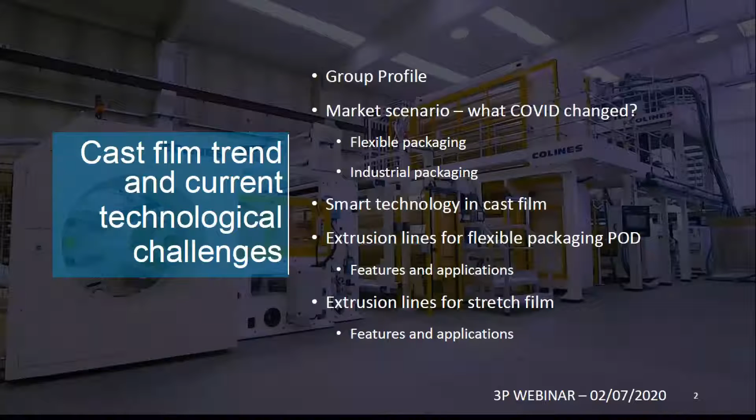So, brief view of our group. We have about 8 units. Basically, 7 of them are on quite a large scale, having a manufacturing division, whilst 1 is only service. We have around 60,000 square meters of owned factories where customers can come and see live at least a dozen extrusion lines for our trials, as well as the lines in manufacturing for our customers.

A good thing to know, and an important one, is that one of these companies, called Elav Electronics, fully owned by us, is a vertical integration within the machinery manufacturing, since we basically engineer and manufacture, based on the Siemens platform, all the electronic and electric parts of the machines, which in any case come shipped in a 40-foot container, dust proof and heat proof with air conditioning inside. So it's really A-class equipment for any kind of machine we supply. So talking about the market scenario, what COVID changed in plastic?

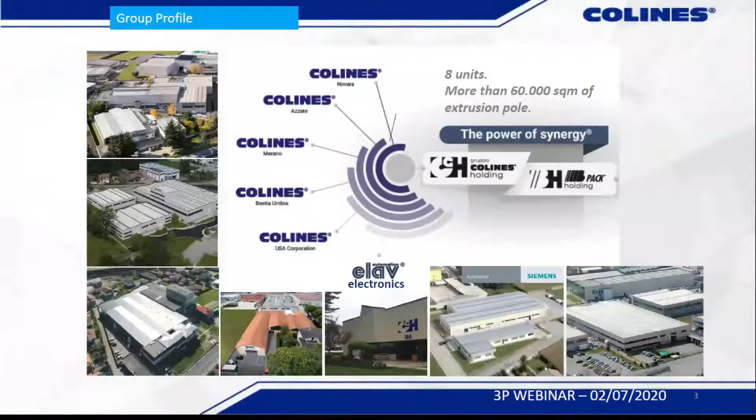I mean, we were having a very difficult, tough time linked to the plastic segment because of the pollution, but definitely this COVID pandemic shows that plastic is really, really necessary, starting from the frontline workers, talking about medics, or everyone also in the military having to deal with people having this disease.

But then it has been scaled in a fast way towards also the packaging of the food, because it has been seen as an additional safety. So wherever food was not packed, it started becoming packed, for example in some areas of Asia. Basically, what is a really clear fact is that plastic itself is indispensable for the future. Then the challenge is how to recover it. And this goes to the next chapter.

So which are the new trends, mostly in flexible packaging, but then going down to industrial packaging, because then you have to move all these goods. So basically, multiple segments of the food market, medical markets, cosmetics, they require further downgauging, because most of them are shifting to easy laminates, being monomaterial, as defined in Europe, but it is also going the same way in other parts of the world.

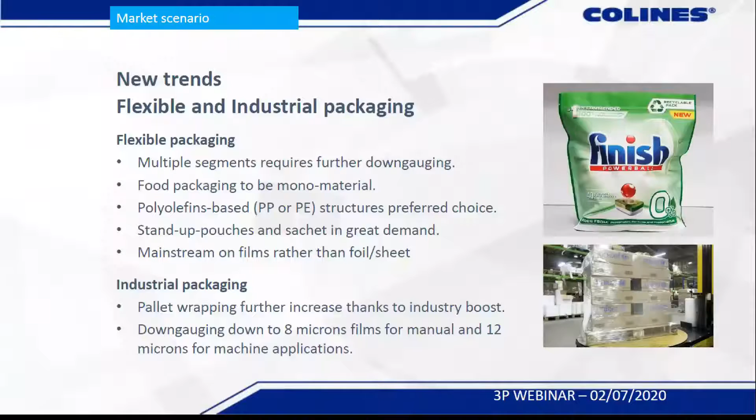This is, let's say, the thinnest film the market is now strongly requesting. Then clearly the 12 micron or whichever thickness is as well in great demand. What we have done as Colines in terms of the machine side: we've been working with polyolefins only, and we've believed in polyolefins since our foundation. The first casting lines were delivered in the early 80s. So the POD lines, the polyolefin design machines that we've engineered and manufactured, actually reflect the market now.

To lower the production cost, we've worked a lot on technology, especially for heating the machine parts, so the infrared technology, of which as of now we are the only manufacturer, is already running in our extruders and our MDO, first installed in 2013. Now we've supplied almost 100 extruders with outstanding reliability. In terms of product enhancement, we have developed the MDO units, now 8 machines, 4 of them under installation, 4 of them already working on a global basis. This was a patented unit and a great innovation.

In terms of process enhancement, we have inaugurated our touchless machines, meaning that the machines show a kind of automation and intelligence that was not there in the past. So all the start-up, all the ramps, change of colors, change of recipe, it goes based on HMI settings. So it's very easy.

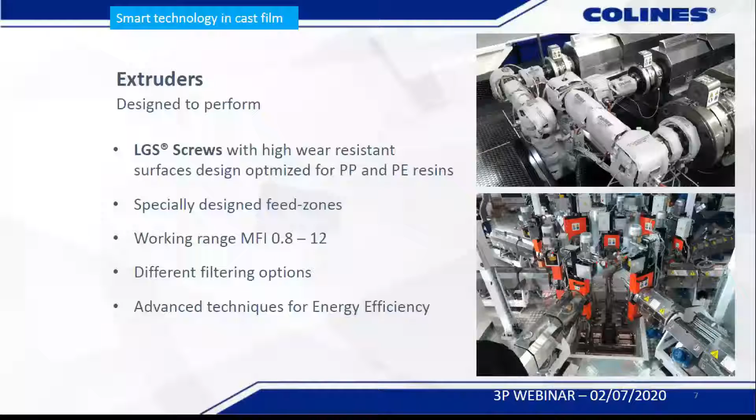It grants and permits a 30% saving over even the best ceramic contact heaters that we've been using till 2012. We've tested machines for 1 year, excellent machine, and the 30% was even 33%. But you know, I take all the precautions saying 30%.

They grant a visible gain in screw torque, so the extruder performs even better, and it basically is a very economic and especially very reliable solution. I have in stock steel quartz tubes that I supply to customers because it's really a reliable system. Why is it so reliable? Because we have developed a software to manage the infrared quartz tube. Otherwise, those kinds of lamps are very fragile as per their nature.

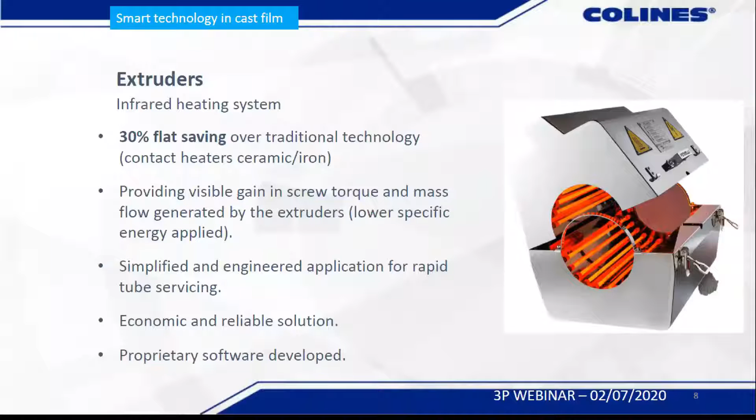In terms of the casting unit, we have a new layout of the machines that sees a new inclination of the die. We have even further improved the wall, making the cooling process more efficient. And now the unit can be moved within linear guides, so up, down, backward, forward, but not anymore on wheels, providing much better control over vibration at very high speed. We also went 1,000 meters per minute with machines for stretch film with this kind of design. And basically it also makes easier the way the recipe sets the machine.

We have an improved pinning design. We are also working with the auto calibration unit within the edge pinning design. And the casting unit itself is manufactured and engineered in a modular way. So many add-ons are available, including post-cooling rolls or intermediate cylinders to make annealing or short stretching straight on the casting unit.

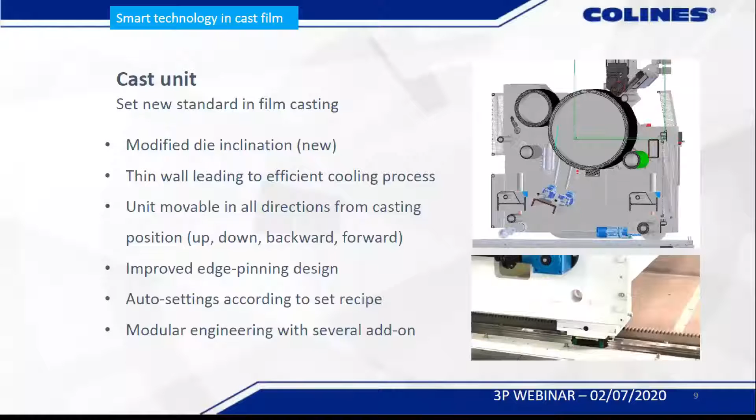About the touchless operation, we use the new Cloren Reflex die, providing superior control over the thickness tolerance. We have developed a software cooperating between the measuring unit and the die, so that in 2 minutes we can go to 2 sigma 0.2, even with big lines. So also change of thickness and especially startup of the machine now requires 1/5 of the scraps that were collected before. There is also the option for making the deckling with motorized motion, so the line then becomes really touchless.

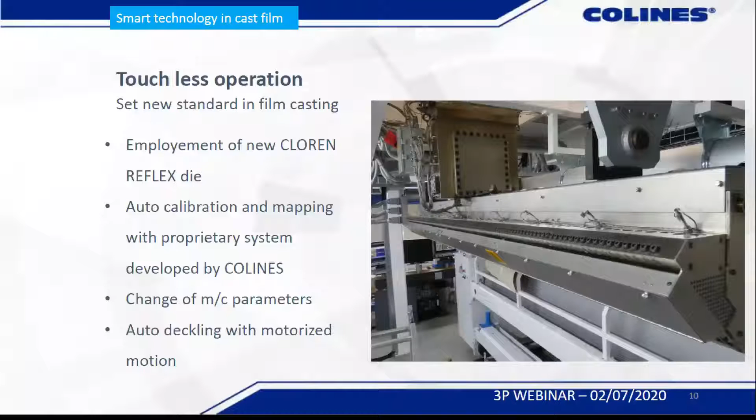The novelty that we've already been using since 2009 is our big mouth system, which basically is a rotary channel feeder. It's not a vertical hopper. This results in a very homogeneous and compact stream of the fluff mixed with granules. So it's an ideal unit for pre-mixing, and it grants total air extraction as the mix is getting fed into the extruder. It also grants very low consumption at max output; for example, on a 3-meter stretch machine or 3.2-meter CPP MOPP lines, it consumes only 4.5 kilowatts. And it permits adding trims coming from other rooms, like for example the slitting unit. It can be employed in 2 ways.

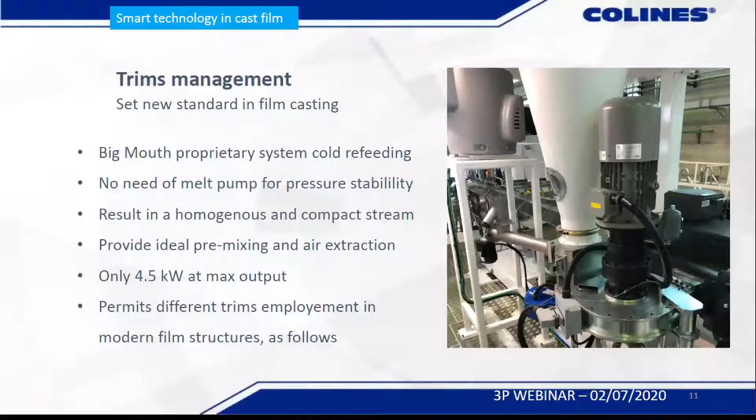The first way, the conventional solution that we've been using for long and are still using, is refeeding the trims in the core layer. So making the mix in the core, normally homopolymer layer or LLDPE, even metallocene with stretch, but anyway in the core layer. The film foil you see here is for a CPP MOPP film. But the new solution we have already supplied in 2 machines.

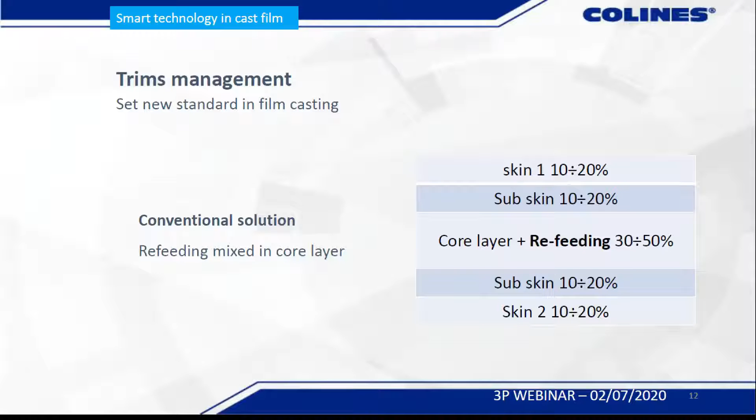It's refeeding the fluff as an individual layer, always in the middle, but there is no longer mixing between virgin granules and fluff. You avoid at all any risk of any kind of impurity. If you match it with the new screw, the film really becomes like glass. It does not impact the other layers made of virgin materials, and this 10 to 15% is about the machine trims. But if you want to also include trims coming from other slitting operations, this percentage might come up to 20%, and we didn't see any problems in going to that percentage.

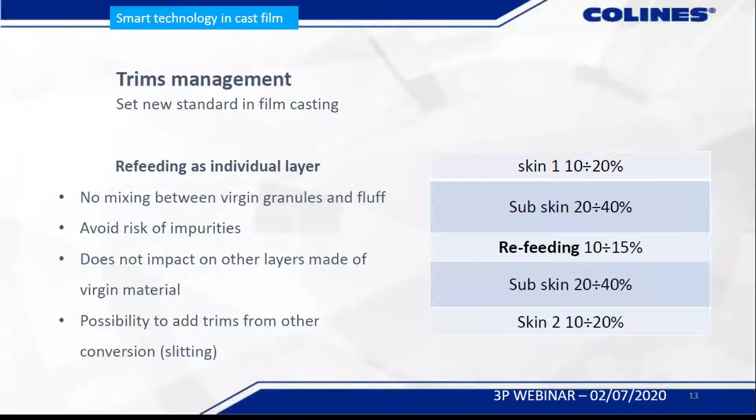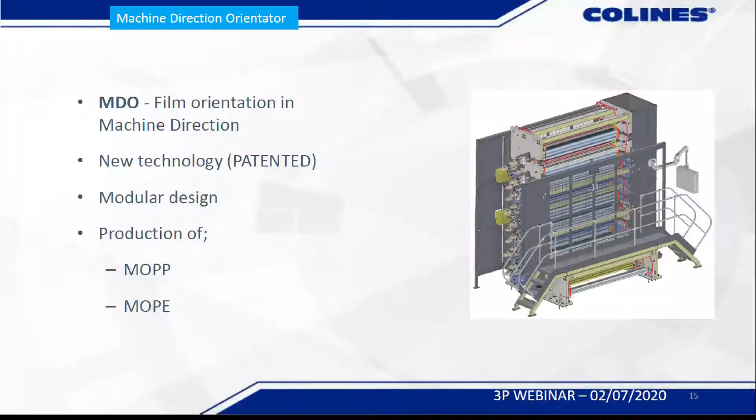Talking about MDO technology, machine direction orientation is the acronym. It's a new technology that we've patented for the heating part. It's engineered with a modular design, so you can introduce a new number of rolls if you want to make different stretching in future, and it permits producing oriented polypropylene called MOPP and oriented polyethylene called MOPE. What is new is we use infrared heating inside, so there is no longer a liquid passage like water, pressurized water or oil.

So we have segments set up. Basically, we can define up to 5 different zones to heat within the left to right cylinder.

And with a special technique, we are able to keep the neck-in very, very small. We are talking about 50 mm each side, whilst with the standard MDO unit, you go minimum 250 mm neck-in after stretching.

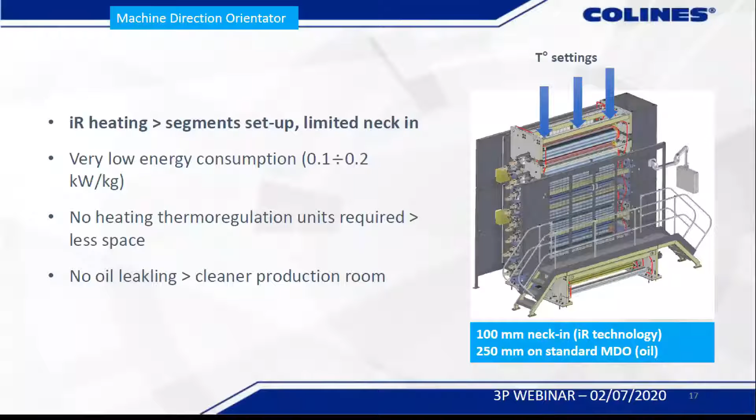It grants very low energy consumption, really very low, because we don't have any heaters or pumps to push the oil around the circuit anymore. It's also very stable in consumption, because the preheating and target settings are reached consistently, since the machine has temperature sensors on the film and inside the cylinders.

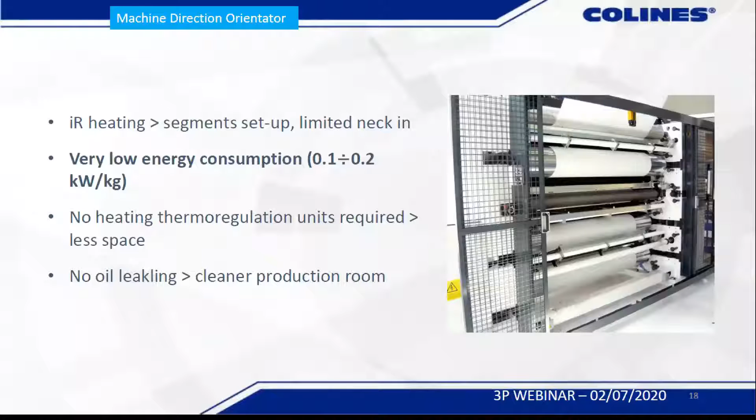So this is the traditional setup - this is the last MDO unit we supplied in 2017, and this is the traditional thermoregulation unit, required for serving the MDO unit. You can see the difference is enormous.

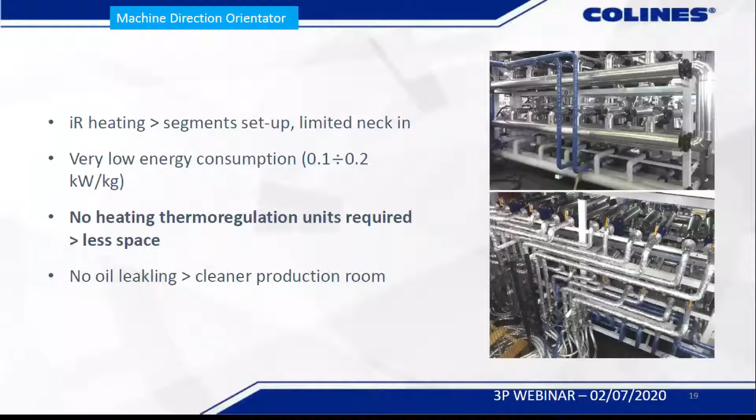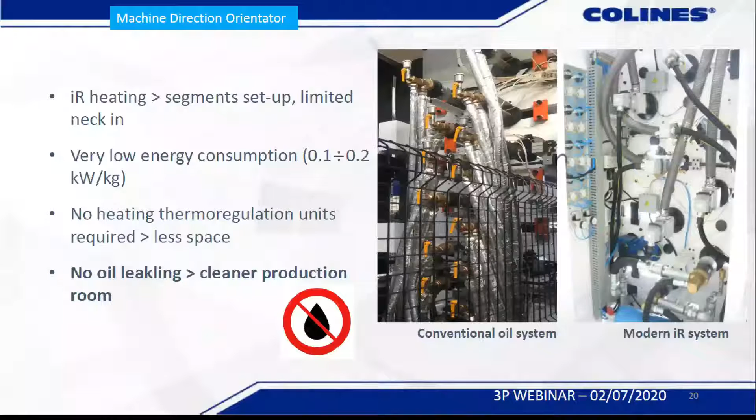One of the most important things is our electromechanical unit that permits us to work by gap or by contact, including very soft contact, basically with no air entrapment, even for very thin film.

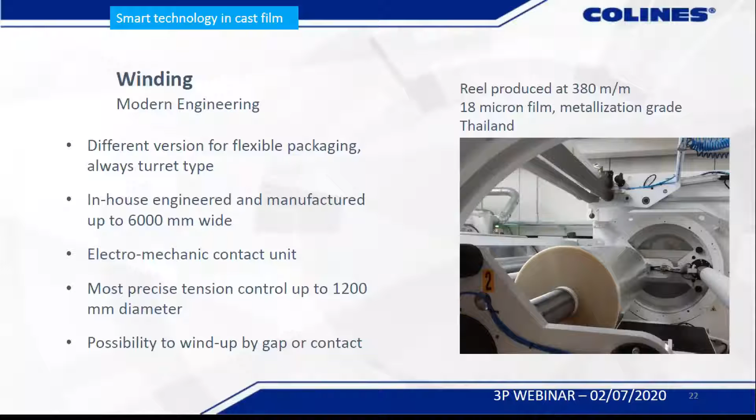Here you can see the same winding unit working with inline slitting in Belgium for 9-layer film for sliced cheese, a growing application in the CPP market, or another one for retort-oriented film in Italy.

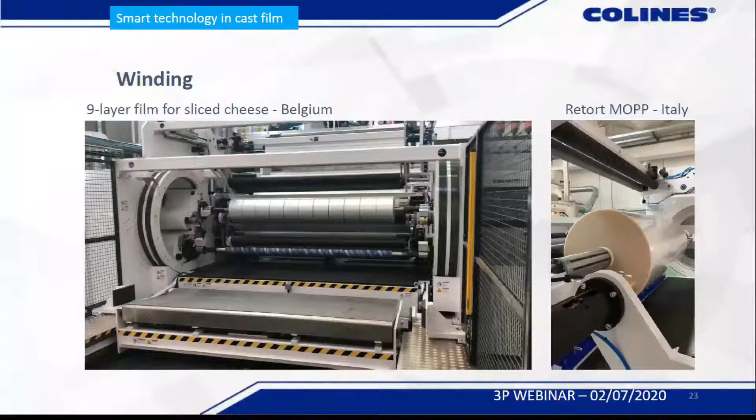So I'll try to be very fast, sorry.

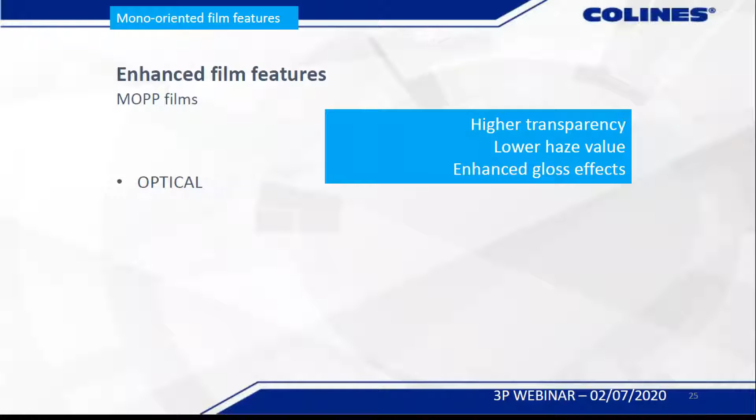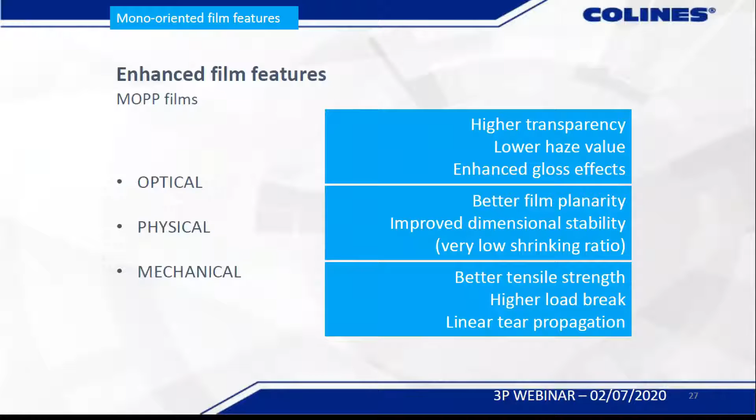Thank you. The MOPP grants optical, physical, and better mechanical characteristics, specifically a better linear tear propagation. The film properties show a 15 micron MOPP having better behavior, so there's room to down-gauge in many applications.

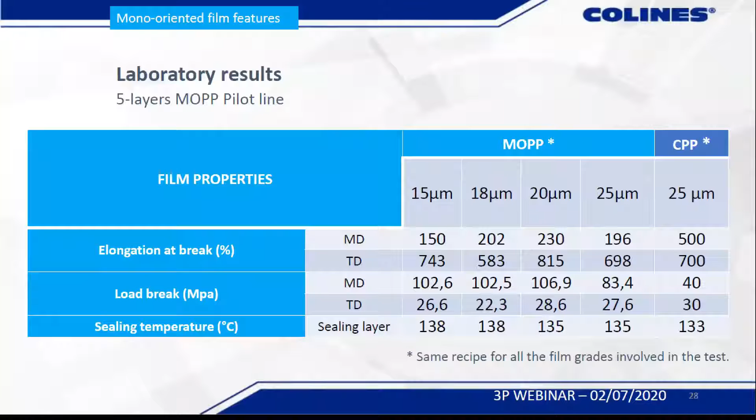If I look at the applications, there's stand-up pouch sachet, such a big market, in which many different products - liquid, solid, or semi-liquid - can be used.

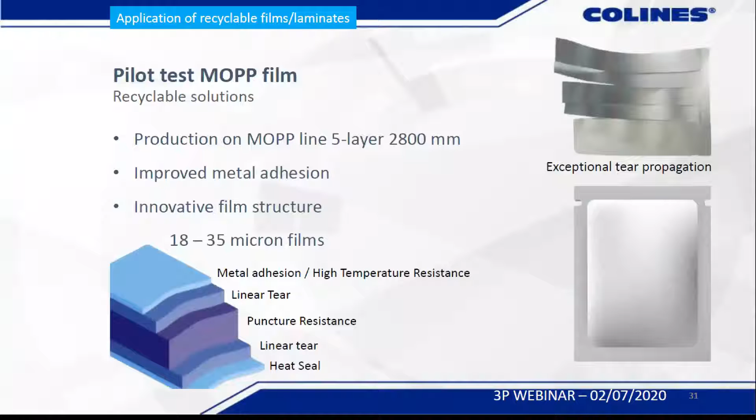We have made different 35 micron sealing grades, as well as a printed grade available in 18 micron, keeping a perfect linear tearing propagation.

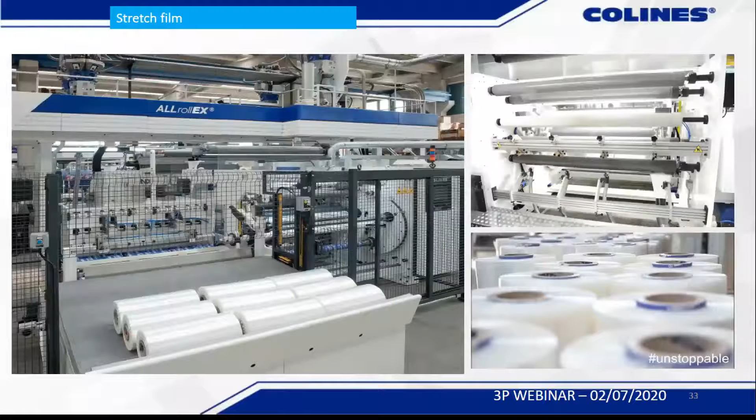I will just spend a few words about stretch film as well. We can supply machines from 1.5 meter to 3 meter, from 700 to 3,000 kg per hour, all formats available. Basically we can produce from manual to jumbo reels on the same machine.

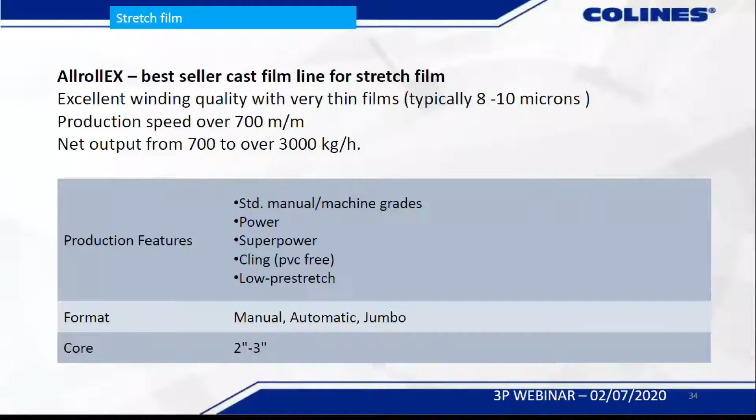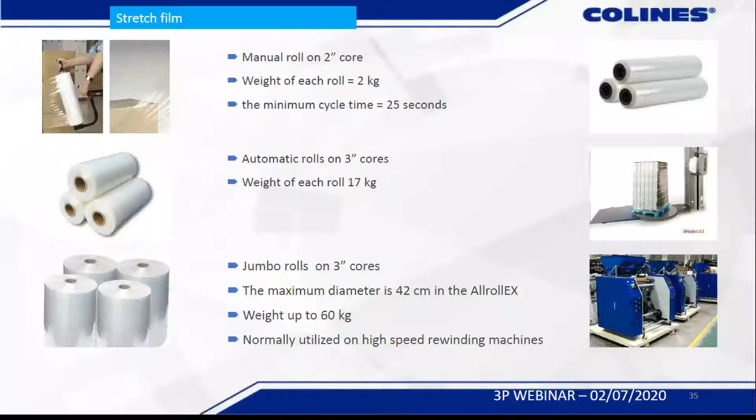We can make any kind of film - automatic power film, pre-stretch film in line with different stretching levels. We also work for cling wrap film applications as well as silage film for agricultural application.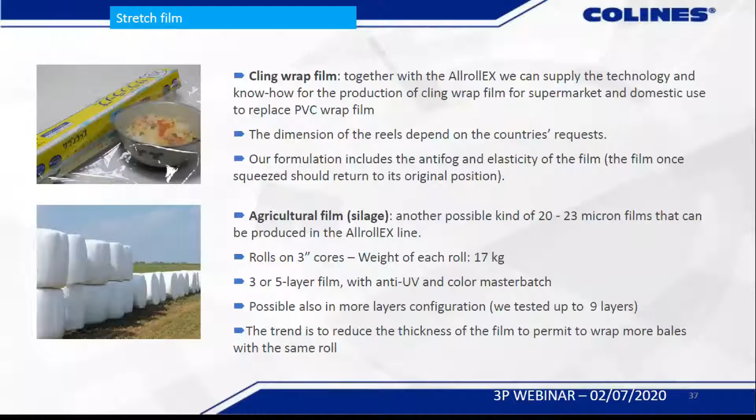I'll skip this - the good thing is we always have lines available for quick delivery, 1.5 and 3 meters for stretch film, so customers are very welcome to inquire with us.

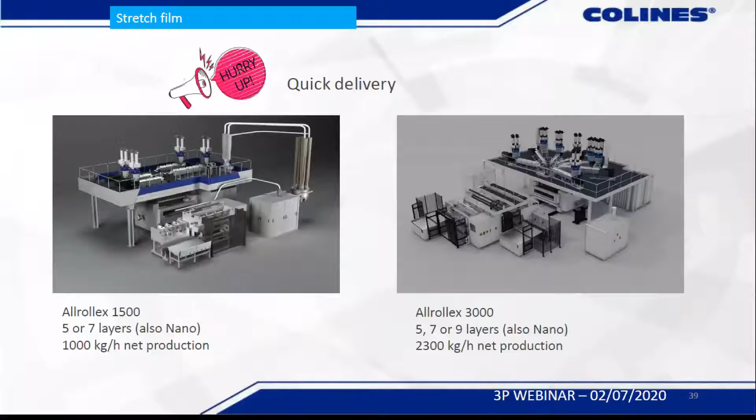Last but not least, as told, we have pilot lines available. We are going with the new range of blown film for flexible packaging and hygienic film packaging. We'll have 2 lines installed in our factory for trials with customers - one 7-layer and one 3-layer, both with MDO.

Then I have to say, I have to salute my dear friend Amir Irani that proudly represents me over there in Pakistan. So guys, thank you for your attention and I hope you enjoyed my presentation.

Thank you very much, Francesco. That was very interesting. You highlighted some of the key features that your machines and equipment can offer - the hygiene aspect, the non-touch features in your new HMI, the energy efficiency, and all the mixed solutions. I'm sorry I had to rush you through. I know you had a lot of detailed explanations available for the technologies you offer, but I'm sure people will be in touch with Mr. Hirani and yourself once this webinar is over, and they will be able to benefit from it.

Moving forward, now I would like to request... Thank you very much. Sorry if I interrupt you. No problem. Thank you very much. We have some questions at the end, which we will forward to you. We do have some questions, which we'll attend to at the Q&A session.

Now I would request Lucia Buffoni and Burhan Farooqi from REPI to come forward and make their presentation. This is going to be a combined presentation from both of them, giving you an overall perspective of the market with regards to circular economy and color technologies in the packaging and plastic industry. They would be talking primarily about the global behavior and how the industry is transforming. With this, I request both of them to please proceed.

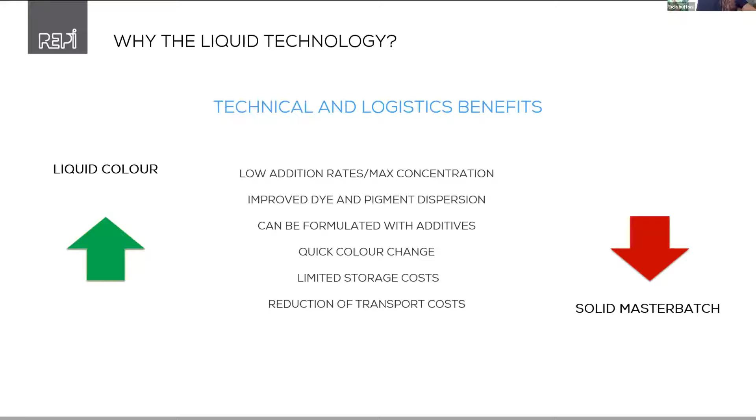Of course, the liquids are much more concentrated, so this leads to logistics which are more efficient, and storage at customer sites. The storage of our colors requires less space than big bags of granules.

Just a few numbers to let you understand the concentration advantage that we have. If we are talking about transparent shades in packaging, for example in a preform as well as in a sheet, the ratio between dosage of liquid and solid master batch is set at around 1:10. Sheet extrusion is even greater, 1:17, because you really need a limited LDR to color the piece perfectly.

Of course, going to opaque colors and talking about titanium dioxide, which is the only one giving the coverage, for whatever reasons - it might be just for aesthetics, or also for performance reasons. If you think of the dairy industry, the dairy packaging, they need protection from light and so on, then titanium dioxide is needed. In this situation, the ratio and the advantage of the liquid is narrowing, so it's limited, but anyway it's there. So liquid color and liquid additive technology are normally more concentrated than solid master batches.

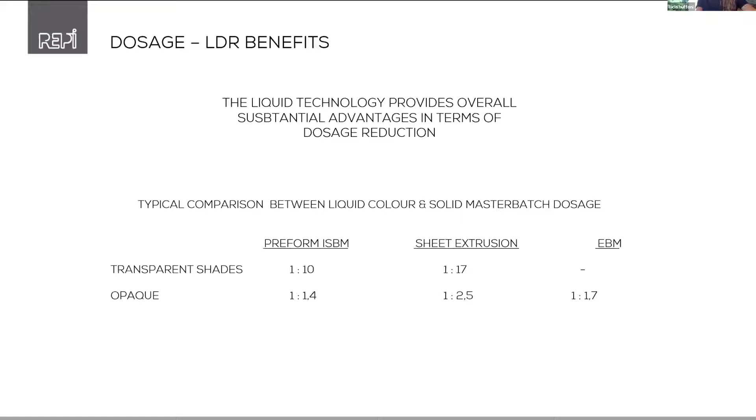Okay, so how do liquid colors and additives fit with a circular economy? We said that REPI is in plastics, and it strongly believes that plastic, as Francesco correctly said before, will still be the material of the future for many applications, especially when it comes to packaging. This COVID situation, but not only COVID, was just another proof that plastic packaging is the choice for the future and provides hygiene, safety, single portions, logistics, and so on. So how can we fit with the need on the other side of the circular economy?

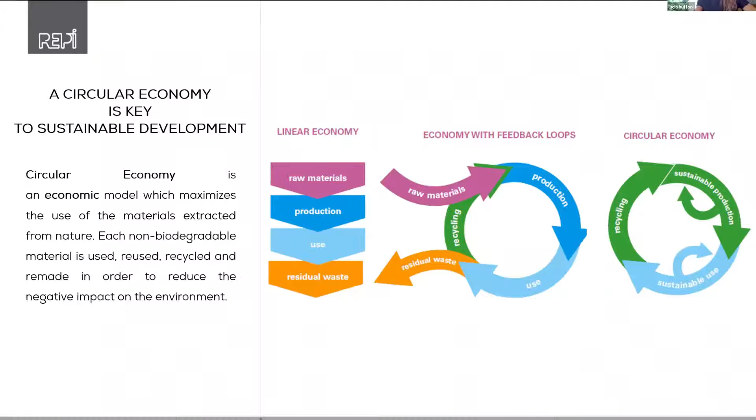So first of all, what is a circular economy? I think everybody knows, because it's really on everyone's lips. We need, and the world needs, to pass from a linear economy - where you have raw materials and products which are used and then thrown away - to a circular economy, where basically most of the raw materials that I use, being plastic but also other things and materials, should be used and reused several times. Plastics, of course, fit with the circular economy, since they are meant to be used several times. It's not really that plastic remains on the world because it's meant to be this way - it can be used and reused several times.

So from this idea, and from the fact that we are dealing with plastics, we created the brand REFIT. Basically, we add a fourth R to the three that are commonly used when we talk about circular economy, which are reduce - try to reduce whatever is not really needed, try to reuse whatever you can, try to recycle whatever you can. And so we add REFIT. We wanted, with our range of products, to give back and to refit, to make plastic, and especially PET, fit again to be used again for packaging.

First of all, what does REFIT mean? So REFIT is a global concept. We try to approach the topic of passing to a circular economy in a complete way. First of all, of course, we strengthen the liquid color technology, as said before, mainly because it has some features and advantages that I already explained before, but I would add in this case that the liquid color technology has overall a lower carbon footprint than other color solutions.

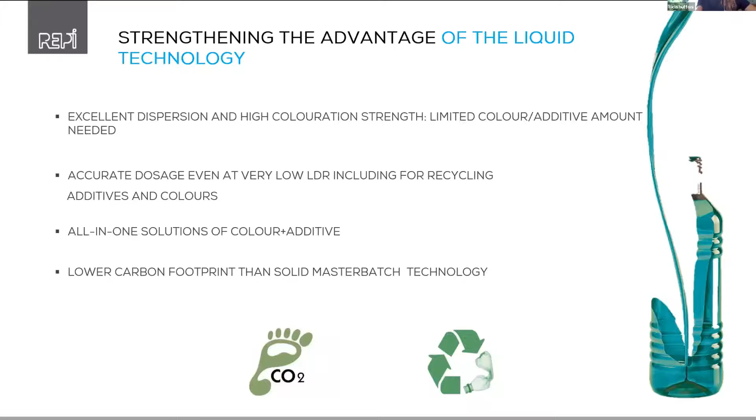Based on the carbon footprint topic, we decided to look inside. Even before going to the market, we looked at our internal production and at our internal way of working. So trying to make our production process and our factories the most efficient possible from an energetic point of view, and the waste management and the raw material supply and handling. So we discovered, and we traced more or less 7 big steps.

Sorry, I don't see. Okay.

7 big steps that start from the raw material supply and the choice of the raw materials that, of course, come from certified suppliers that as well are sensitive to the sustainability issue, going to their transport to our facility. And then going through this flow chart, we discovered that if compared with the same process, but in the solid master batch manufacturing, the carbon footprint is always lower.

If we look at point 3, which is really our business, so producing our colors and additives in our facilities, the processing technology is crucially different than a solid master batch. We do not use high temperature. We just use room temperature for all our machines and processes. Why? Because the liquid color technology means basically taking a carrier that is already liquid and blending it with pigments, with dyes, and then following the several steps of refining that might be necessary. But it is an energy efficient process. So this means the carbon footprint of our production process is really under control.

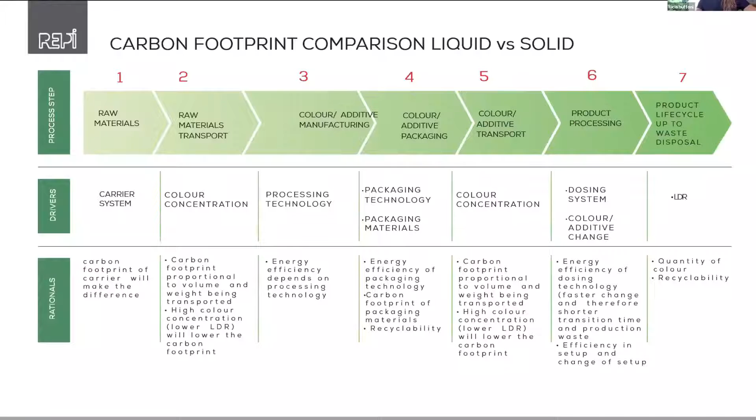And last but not least, what does a limited LDR in the plastic piece mean? It means that when it goes to waste, I will have a plastic packaging or a plastic part which has a limited quantity of our product. So overall, the carbon footprint in the process of a liquid color technology or additive technology is under control.

So REFIT, what does REFIT also mean? Of course, REFIT means also a dedicated range of products. We have developed different additives, different colors that cater for the needs of users willing to use recycled polymers. Starting with the most common, most popular additives of our recycling range, we have the anti-yellows range. They are dedicated to recycled PET. As you might know, working with recycled PET can be tricky because from producer to producer, from one provider of rPET to another provider, the shade and the quality might be very different.

Shades are different, so it means that from time to time I get a greenish RPET or a grayish RPET. Some RPET are really very dark, some are even reddish, and so on, because of course the sourcing is different and the treatment is also different.

So we have developed a line of products that can act on the different Lab* values according to the incoming material. And being an additive that I can add on the production line gives me total flexibility. So we have customers that have in their production different anti-yellows, and they just change from one anti-yellow to the other according to the incoming material.

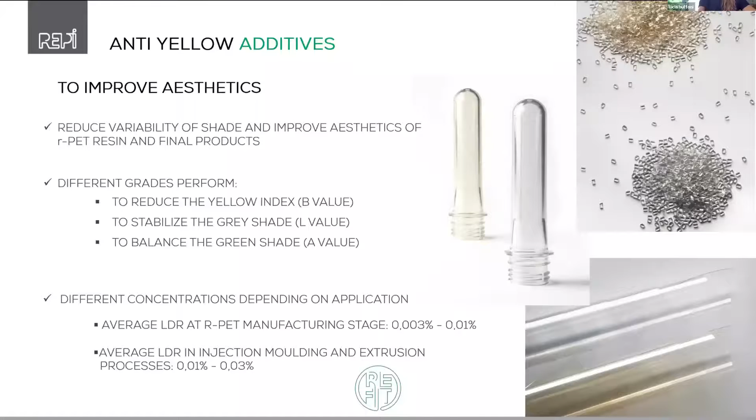As you can see, the LDRs are as limited as 0.003 or 0.002 sometimes, and this is enough to correct the off shade. Together with the anti-yellows, we also have optical brighteners that basically avoid the drop of the L. They try to maintain the brightness of RPET so that it looks as similar as possible to a virgin PET.

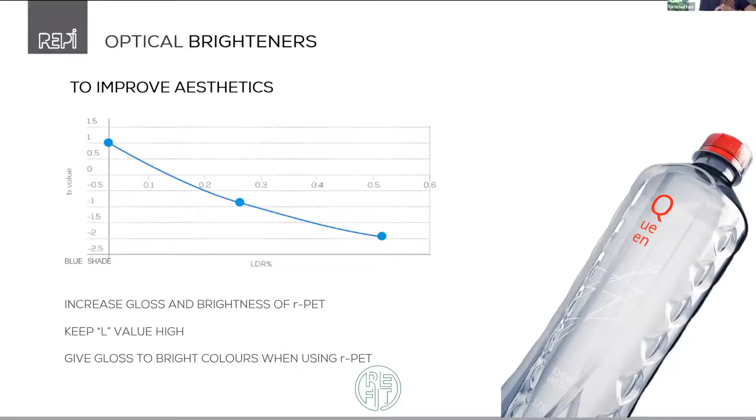These optical brighteners are very often combined with anti-yellows, so that we have two performances in one single product.

Excuse me, Lucia, just a reminder on the time frame, because we also have to have Burhan on board to say a few things. So if you could speed it up. Yes, sure.

Thank you. Sure. So we talked about additives that improve the aesthetics, but we also know that RPET can have mechanical problems. An IV lower than virgin PET leads to mechanical problems of the final packaging. For this reason, we have IV enhancers, additives that take the short molecular chains of an RPET, combine them together again, and make the linear chain longer again, more or less as long as a virgin PET. This allows users to work with RPET as they would with virgin PET.

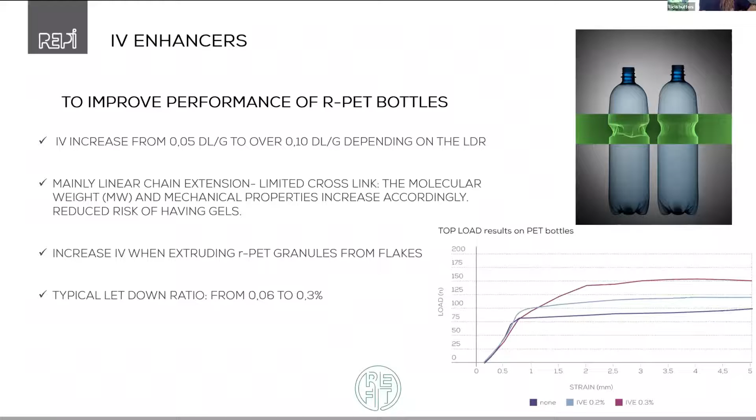Not only additives, colors, of course. At a certain point we understood internally: why don't we take advantage of the starting shade of the RPET, which can be grayish or a little darker, and just by adding a few drops of some specific colors, we end up with premium-looking packaging. This is already happening with some brand owners. They want people to know that the bottle is made of RPET, so not masking 100% of the RPET content, but taking advantage of it.

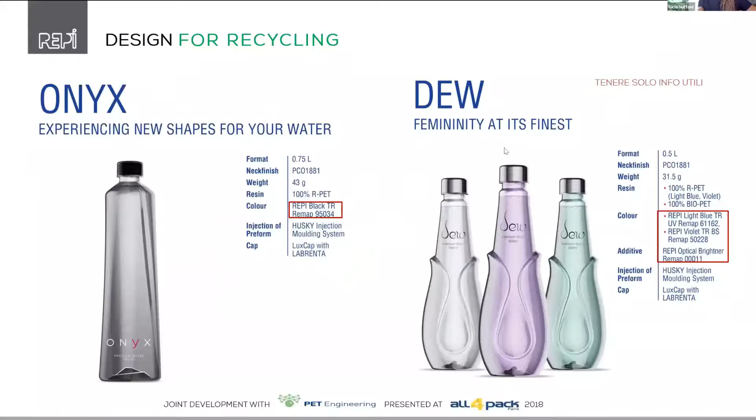This is a nice example range that we have developed for that. You can see, for example, two projects we developed for restaurants, for the HoReCa channel, 100% RPET: a fumé black, really nice looking, or very light shades that do not completely mask the RPET content.

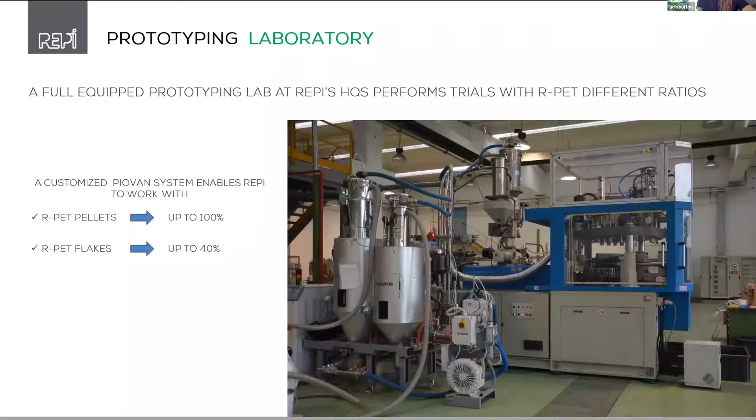This happens in our prototyping lab. We have a prototyping lab in northern Italy, a single stage machine that can produce different shapes of bottles, connected to a Piovan system with different silos that allows us to mix flakes and pellets of RPET in different ratios. This is still very interesting for people approaching the world of RPET and willing to understand how the RPET influences their production and the difference between a flake and a pellet. So we can do several mixes.

So I would have final notes now. I don't know if Burhan is back on track, or maybe I share my final notes and then he comes back. Well, okay. You can say your final note, and then we'll hand it over to Burhan, and he can finish the presentation. Perfect. Okay.

So final notes, just to finish. Plastics will grow their volumes in packaging applications in the future, and this is no doubt all over the world, from north to south, from east to west. Developing a circular economy is for sure a challenge, and everybody needs to deal with it sooner or later. Of course, for all the stakeholders of plastics, it is a great opportunity because we can provide solutions that add value to recycled packaging.

REPI has been in the market with recycling additives for many, many years, and we are still growing our know-how every day, but we already have a bit of expertise that we are really happy to share with our customers. The partnership between REPI and Green Chemical offers a fantastic opportunity for Pakistan and for GCC countries to get to know and choose the liquid color and additive technology, because this is the technology of the future.

Thank you very much, Lucia. I would now request Burhan to move ahead with his presentation. We are short on time. I'm very sorry, Burhan, you will probably have to rush through a few things, but thank you very much for a very informative presentation, Lucia. Thank you. Okay, so first of all, can you see the screen? Yes, we can see your screen. Thank you. I'm sorry for this technical hitch, but it was a very interesting presentation by Lucia. I will quickly review in a few minutes.

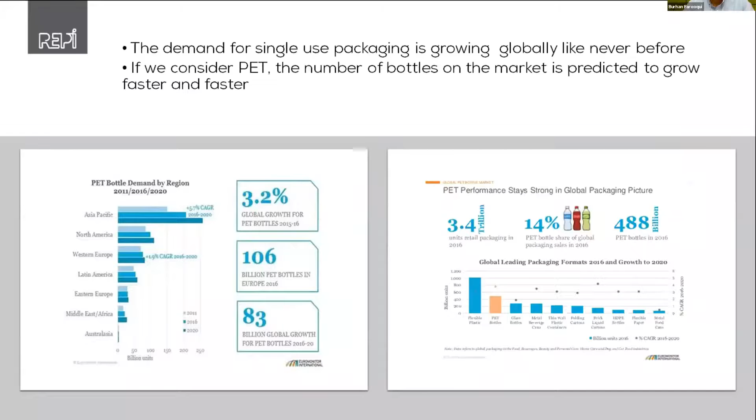So the numbers have already been shared. The idea is that packaging is growing. Plastic is growing. In 2027, the expected plastic market would be 722 billion US dollars globally. So you cannot avoid it. All we can do is learn innovative ways to deal with it. And as Lucia said, plastics have many lives to stay with us, and it is meant to be like this.

So a quick glance at who we are and what we do: we are an emerging company. We provide one-stop solutions, not only technical products and technical advice, but consultancy as well. We are really committed to the environment, the people, the stakeholders, the planet, and the processes as well. And we have a team that is experienced, knowledgeable, and service-oriented.

Besides the topic of today, we cover a bigger portion, not only liquids, but also titanium dioxides, carbon blacks, pigments, OBAs, and some filler masterbatches. On the technical and performance side, we are the formal representatives and agencies in Pakistan for world-distinguished companies who offer their services through the right channel.

As Lucia mentioned, the liquid comes with dosing equipment as well. It needs very precise dosing, and precise dosing needs state-of-the-art equipment, and it's very user friendly as well.

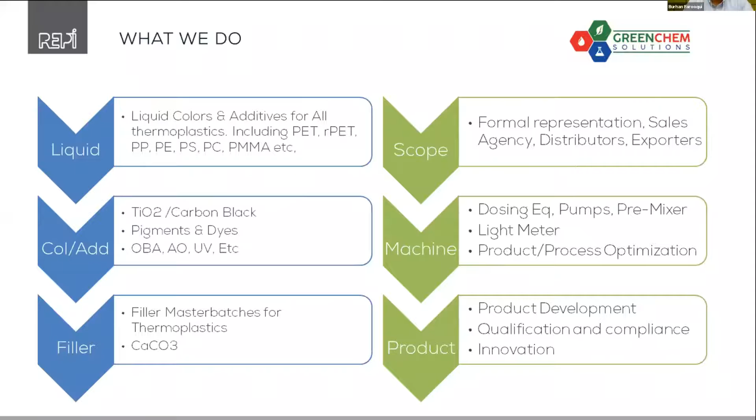Then we are happy to be collaborative. We are very excited to work with a well-known company that has focused for the last 40 years only on liquids. That shows their seriousness, their knowledge and technical know-how, right from the start to the end of the process, and to its end use. So we are very happy to share our services with REPI, especially for the Pakistani market as well as the GCC countries.

Sorry, I'm hearing some.

Anyway, yeah. I'm sorry, I'm hearing some noises. Rather, I don't know. Okay. Okay.